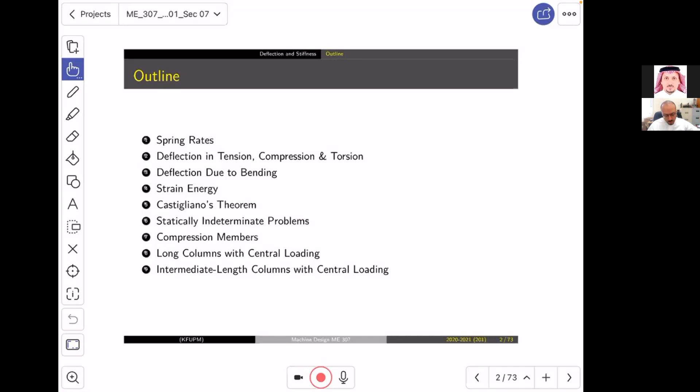Now, with respect to the spring rate, it is more or less an analogy which is trying to explain that material actually behaves like springs, especially when we talk about the elastic region, and the relation between the deflection, how much extension is going to result from the application of the load, might have a linear relation or nonlinear relation.

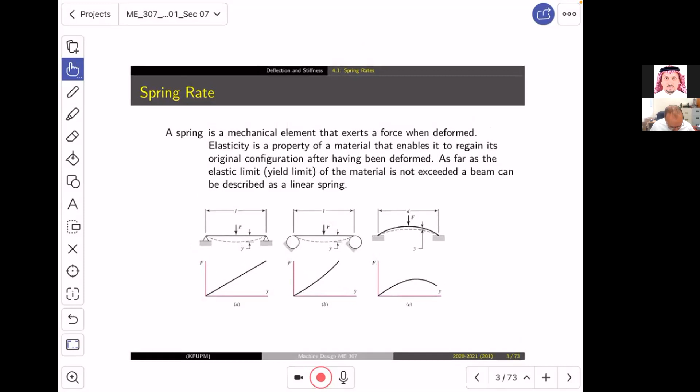This is some example showing you here that, for example in A, for a beam which is simply supported and being subjected to a transverse load F, the amount of deflection is linear with respect to the force. But there are cases, if you put rollers, where the deflection becomes nonlinear, as you see. This is the deflection Y, just showing you that the relation is not always linear.

That's one thing. Now, the deflection, which we called Y in this example, is the amount of displacement happening to the body. We are going to call it delta. That delta, that deflection, is a big word. It is not extension, do you understand? It's not something getting longer only. Rather, the word deflection means if you take something and you twist it, the amount of deformation happening due to the twisting is also deflection.

If you pull something, it gets longer, that amount of elongation is deflection. If you compress it, it gets shorter, the amount of shortening is also called deflection. So it's a very general word.

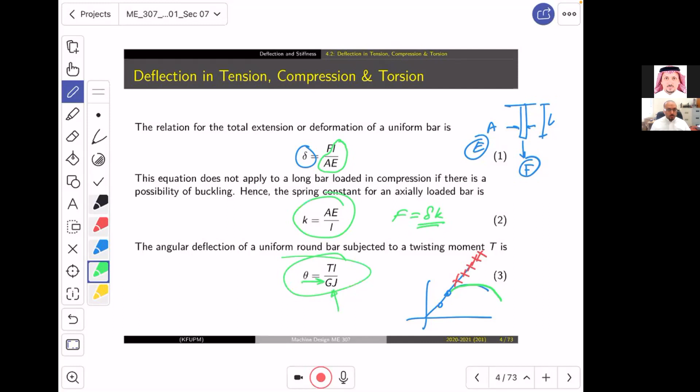Now, also the deflection for torsion is T, the torque, multiplied by the length, but this time we divide by the modulus of rigidity or shear modulus G, and instead of using area for loading, which is tension, we use J for torsion. You can predict that if the deflection for moment is to be deduced, then it should have M, the moment, and it should have I, the moment of inertia. That's how I want you to think about it.

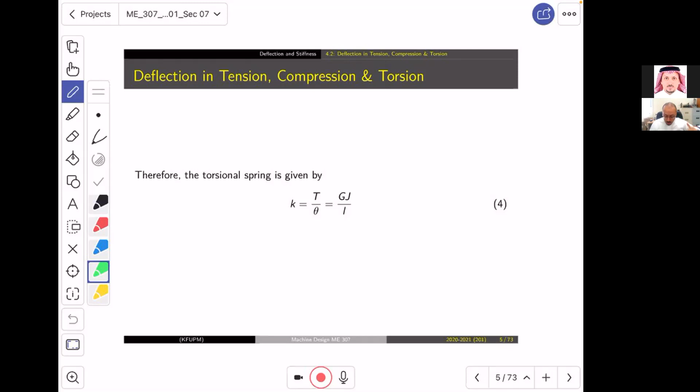So we will talk about this later. What is important is that the deflection, which is basically how things are deforming, can be related to a distributed load. You have a distributed load, you get different deflection. So a beam sitting on whatever support, if you apply a distributed load on it, it will deflect differently than if you apply a concentrated force. That's the idea behind deflection.

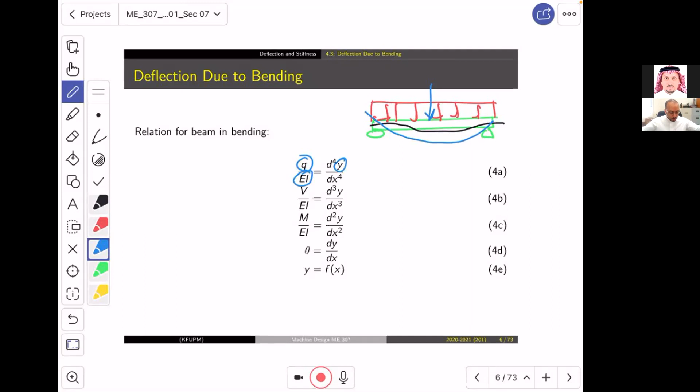And how this deformation shape becomes recognized is the following. If you recall, the relation between a distributed load Q over EI - E is the modulus of elasticity, and I is the moment of inertia - is related to the fourth derivative of the deflection Y with respect to X. Shear force is related to the third derivative, moment is related to the second.

And then the deflection, if we talk about beam and bending, the beam, when you bend it, the deflection is actually rotation. Why? Because the beam is straight, and when you bend it, it curves like this. So the reality is that you just change the angle of the beam with respect to the horizontal.

I know what you are thinking - you are thinking about the deflection, which is delta, which is how much down did it go. That deflection is also going to be measured. We'll see. So basically, that's the beautiful thing about this equation: if you relate the deflection with respect to the moment, you will measure the slope. If you relate it to a single force, you will measure how much down this will go or up, as we are going to clearly see.

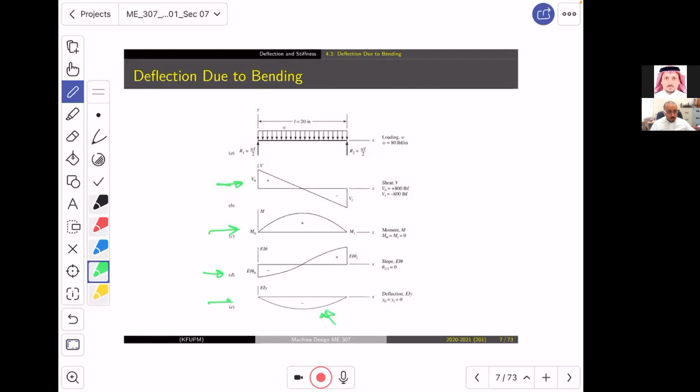Now, this is the relation between Q and the deflection - the distributed load. This is basically the differences. That's why we have a fourth order, a third order, a second order, and then a kind of zero order. Okay, this is just a review.

Now, if you remember, I am not going to spend time on this - this is for the slide, for you to refresh your memory. If somebody told you that a simply supported beam is being subjected to a moment which is a function of a distributed load W, this is the moment distribution. Basically, the moment distribution is like a moment diagram.

From x, which is less than or equal to L, the length of the beam, and greater than or equal to 0, for the entire beam, a simply supported beam. What do we do? If you recall, we want to determine the equations for the slope and the deflection of the beam: the slope at the end, and the maximum deflection in the middle.

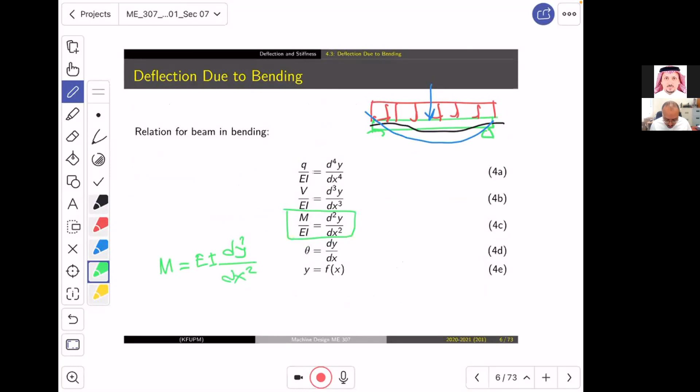So what are we going to do? We go back to the equation explained previously. If we have a moment equation, then basically M is equal to EI multiplied by d2y divided by dx squared. So that's what we're going to do - we're going to use this equation.

And if we write down the moment, what do we need to do? We need, in order to find y - because nobody is interested in d2y over dx squared - if you want to solve this differential equation, you need to integrate. Since we have a derivative of second order, we need to integrate twice. When we integrate, we use indefinite integrals, no limits from x to y or whatever. Because of that, the first integration introduces a first constant, and the second integration introduces a second constant.

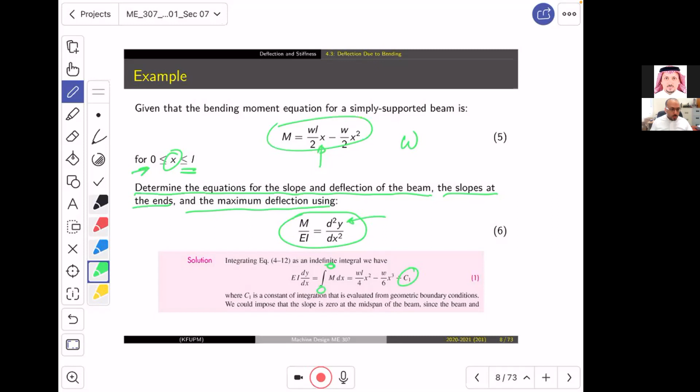Then we substitute the boundary conditions. For example, for a simply supported beam like this, the deflection here equals 0. We substitute deflection equals 0 at that location and find the first constant. Then, knowing that this is a simply supported beam, the deflection in the middle will be maximum, so the derivative there will be 0 - that's how we find the second constant.

If you remember, this is basically what we did - we integrated the moment equation twice. And then what happened? As you see here, what did we do? We said that... let me clean this up. So this is what we did: we just multiplied this by this.

So what do we have? We have EI multiplied by dy squared, which is equal to M dx squared. So then if we integrate this and integrate this, I should have written the integral, because M is a function of x outside here.

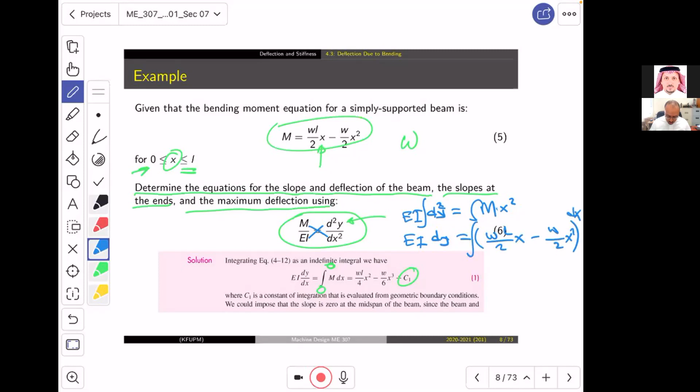So what happened here? We will have EI dy - that's what we're going to get. And then we have M, which is WL over 2 times x, minus W over 2 times x squared, then dx. So we integrate this, and that's how we get the constant. Then we integrate again and get the other constant.

Remember, when we integrated this twice - since it is EI dy squared - when we integrate it the first time, we get EI dy. When we integrate it again, we get EI y. And that y tells us how far down, along the y direction, the beam will go.

Now, then what do we do? We apply the boundary conditions, and by applying them we can determine C1, the first integration constant, and C2, the second integration constant. Then, if we do that, we can find an expression for y.

Now look how powerful this equation is. It tells you that at any location from 0 to L, wherever you want to know, if the beam is deforming like this, this equation tells me how much y is - here, here, here, here, here - infinitely many points. Anywhere you point, I will tell you how much y is. You understand that?

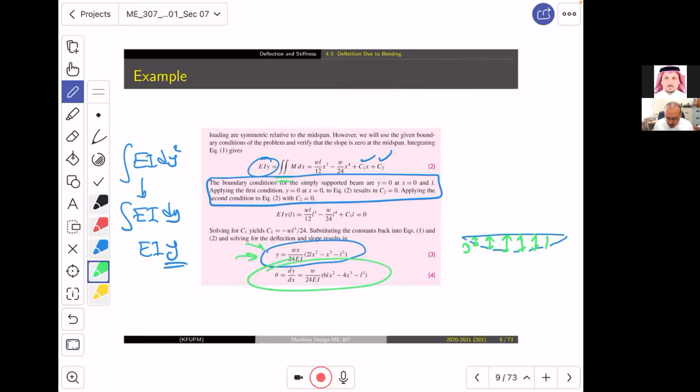So the idea is that this equation for the amount of deflection is very important. And then, if we take the derivative of this solution with respect to x, we are actually getting the slope. Now why is the slope important? We'll talk about it in chapter 7, but you will have both the slope and the deflection.

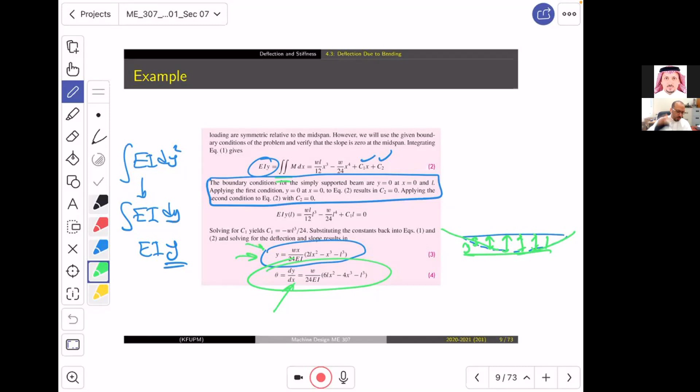So you can find from that - we're engineers, huh? You convert anything into an equation. I use my mathematical magic in order to get you a number. What is the maximum? What is the minimum? So we can find the maximum, the minimum, and that's how we obtain those little tiny equations.

The maximum is as simple as 5 multiplied by W, L to the power 4, divided by 384 EI. Amazing, very little tiny equation. You can bring your calculator, actually you can use your phone to calculate how much is this deflection. You don't need to integrate in the field, in the factory. You don't need to.

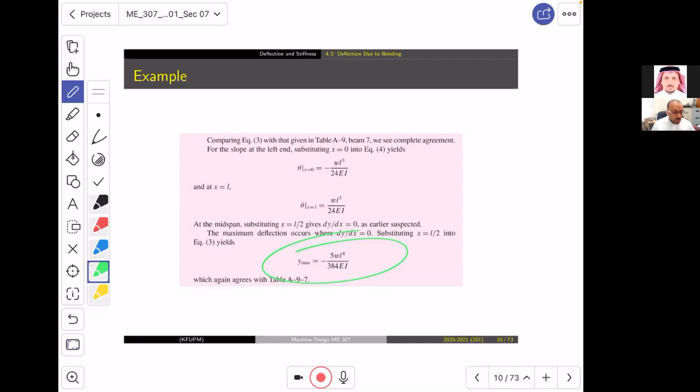We work so hard to make relations very easy for engineers and practitioners. Our problem is that a student comes and says I didn't ask the Aramco guys, they don't use this. Don't get it wrong - Aramco buys the turbine, they don't manufacture it. And if Saudis keep buying forever, this might change.

One day, inshallah, we might have our own factory here which will fabricate them. And if we fabricate them, then ME-307 will be the most important course for the kingdom - with exaggeration of course, there are other important courses.

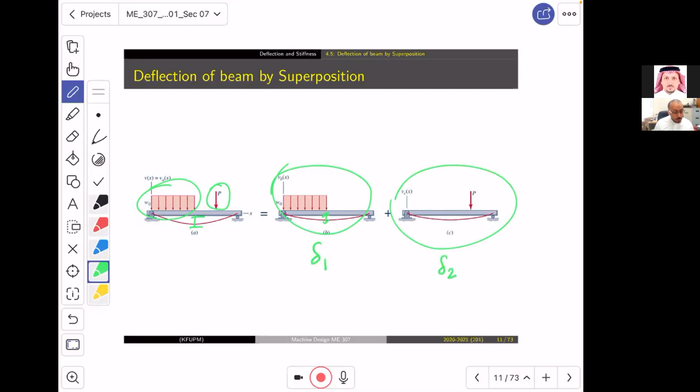Then, since we use superposition for deflection, if you want to know how much is this little tiny deflection, you measure the deflection from here, and then measure the deflection from there, and the total deflection will be delta 1 plus delta 2. It makes sense, right, if it is elastic.

Now, but you may ask a question. You say, how is it easier right now? I have one problem, now I have two. Well, the good thing about superposition is that there are a lot of standard solutions for it.

So for example, if you look at the slide, this is the solution, which is, by the way, in your textbook, at the end of the textbook.

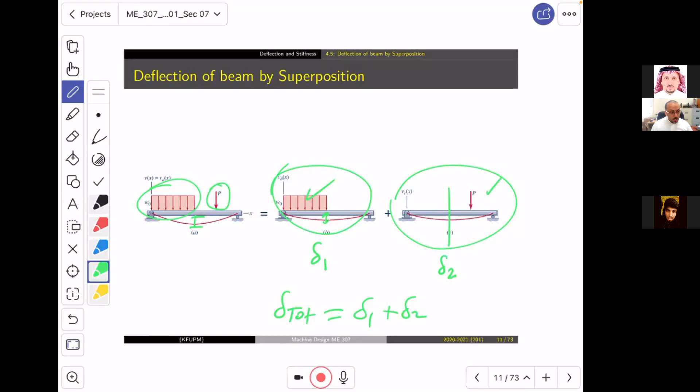I think there are 20 in the book in the back of the book. So when you have this, that's it, you're done. What you need to do now, for this example, is find a ready solution for a distributed load, a ready solution for a concentrated force shifted, not acting in the middle. Solve both of them, add them together, and we're done. So let's go to an example.

This is an example for what seems to be a complex matter. We have a beam which is subjected to a distributed load w0. Yes, Faisal?

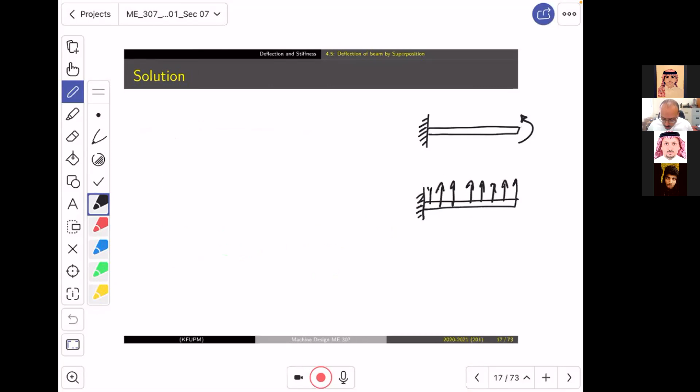And then the third problem is the beam with a concentrated moment. So basically, what are we going to do? We are going to find the deflection for this one. If we go back to the solution, we find that the deflection for this one is P0L to the power 4 divided by 2EI. How did we get this? Well, let me show you.

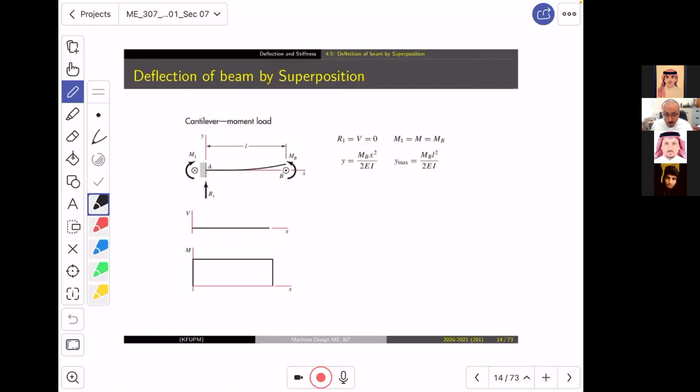There is something very important you need to notice, a critical mistake that students often fall into.

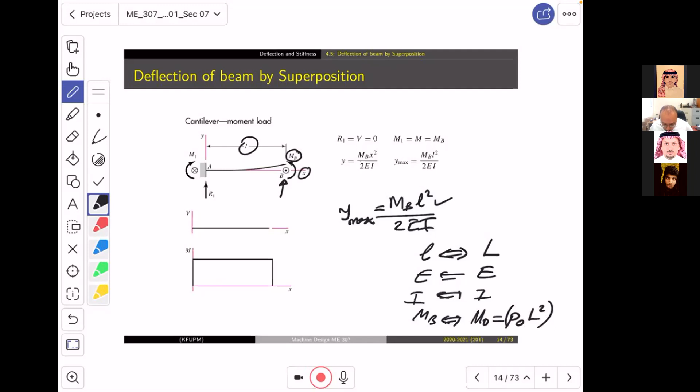What would MB be? It would be the moment equation. What was the moment? M0 had the value P0 L square. Do you understand that?

So if you go now to this, what will happen is the following: you will have L to the power 4. Do you get my point? Because we have L from the equation, L square from the equation, and L square coming from the moment. Now this is also messed up—students always make a mistake here.

Superposition is supposed to be easy like this, but most students make mistakes in superposition, unfortunately—it's the deceptively simple part. Now, if you go to the distributed load...

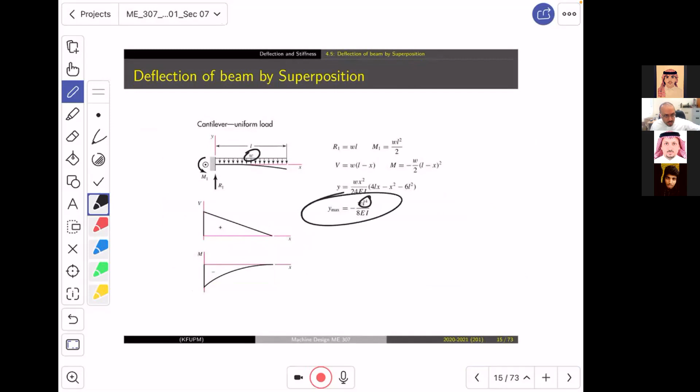We have a solution for it; it's acting downward. The solution for the distributed load gives W, the distributed load, multiplied by L to the power 4, divided by 8EI. Now, if you go here, the distributed load value is P0. So it's not very challenging.

The deflection for this is going to be P0 multiplied by L to the power 4 divided by 8EI. However, it is positive. Why? In the equation, it is negative because it's acting downward, but this one is acting upward. So be careful - those equations need to match what you have.

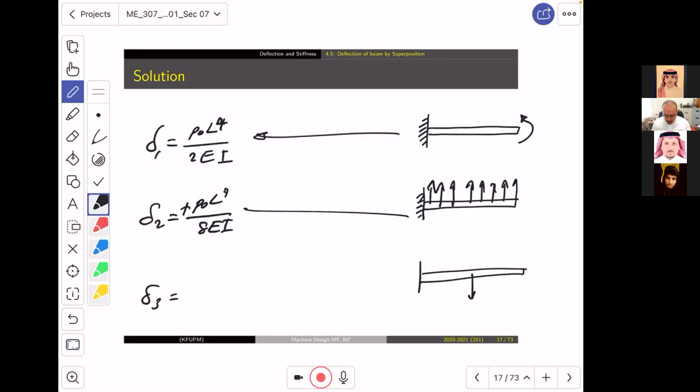So you will have another concentrated load. The other deflection is for a free beam acting in the middle. If you go back to the solution and match it with what you have, you will end up with -5 P0 L to the power 4 divided by 48 EI. And then, in order to find Y at point C, you just sum them up.

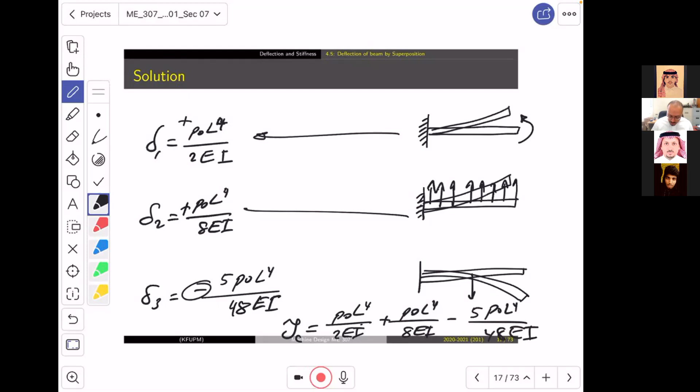Why? Because when we cut a beam, what do we do? Shear and moment - we substitute. Exactly. And when we substitute a shear and moment, we're basically putting it as a fixed condition, because the beam is fixed from this side and fixed from that side. Do you understand? So this problem is going to be like this.

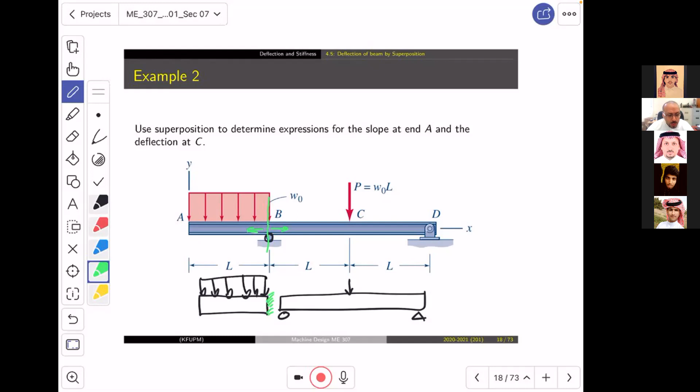Do you see this? Now let me show you how we are going to deal with this condition. But I think we're running out of time. Let me ask you now to switch on your webcams. I'm going to turn off mine, and we're going to take the attendance. In the remaining few minutes, we can talk about this.

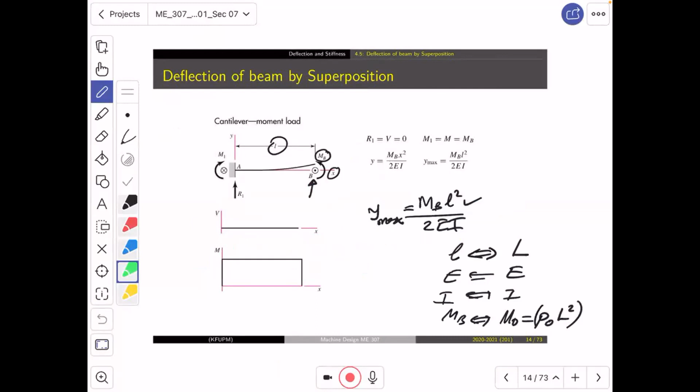Yes, this one. So which problem do you have? I mean, we split it into 3 problems, right? Yes, this one. He said M0 is equal to P0L squared - is this given for this specific problem or is it general? No, instead of giving you a value, it gave it to you as a function of L squared.

Oh, because I thought the load is related to the moment. No, it's a constant - it's a value, a variable which is related to the distributed load. [audio cuts out]